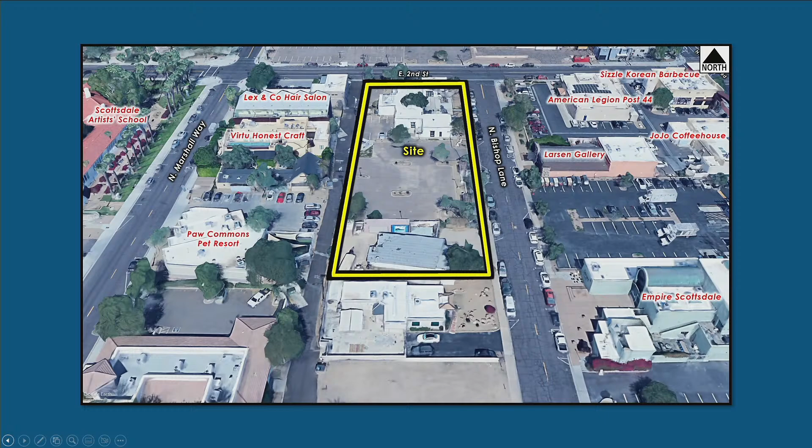Here's a closer look at the subject site at 2nd Street and Bishop. You can see some existing structures on the building. There was previously a restaurant there that's been vacant for a number of years, as well as a smaller office building on the south end of the site. The site has since been demolished and cleared in anticipation of the future development. The surrounding area is mostly other low-scale commercial uses and residential. The existing zoning is commercial C3 in our downtown overlay, which does allow the proposed mixed-use development as shown today.

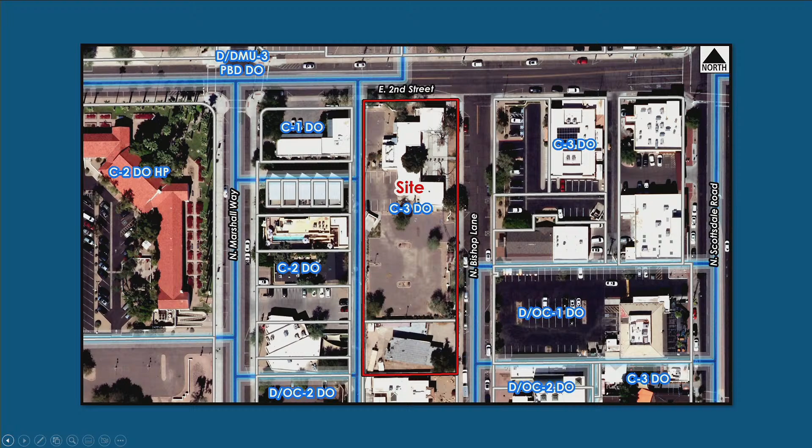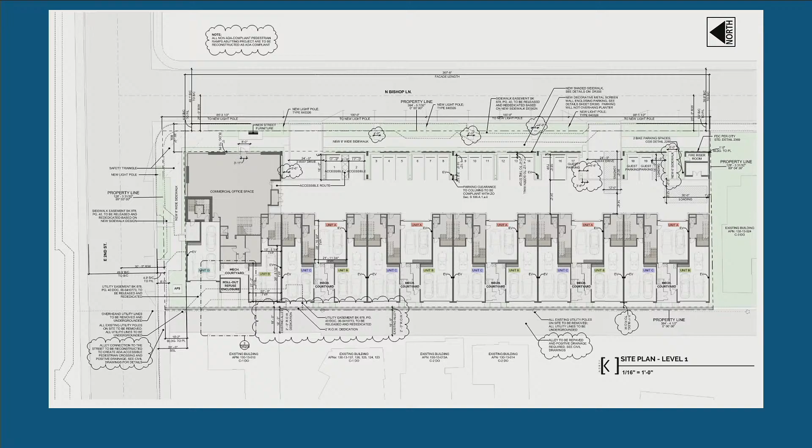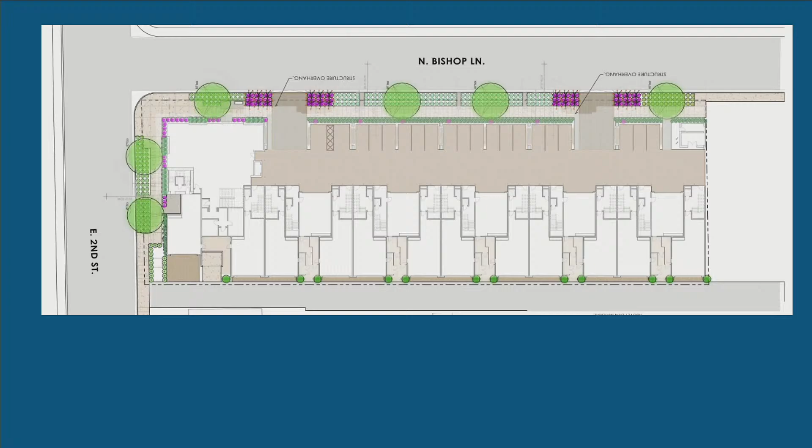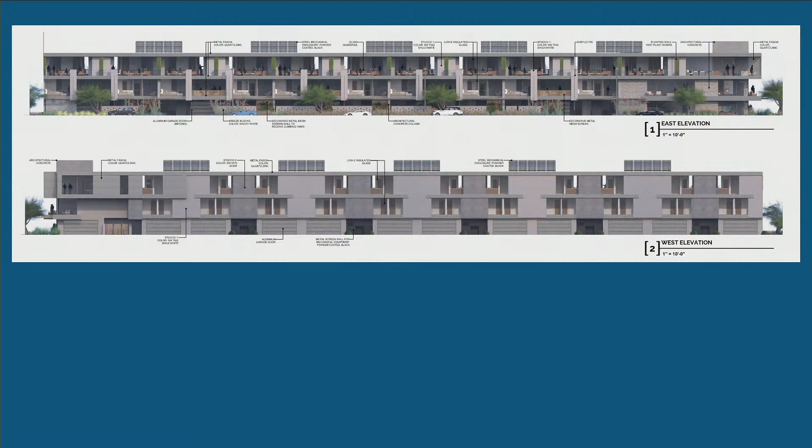Here's a look at some of the building elevations. On this screen, the east elevation is on top and the west elevation on the bottom. You can see it's a 3-story building, capping out at about 36 feet in height, exclusive of the mechanical equipment on the roofs.

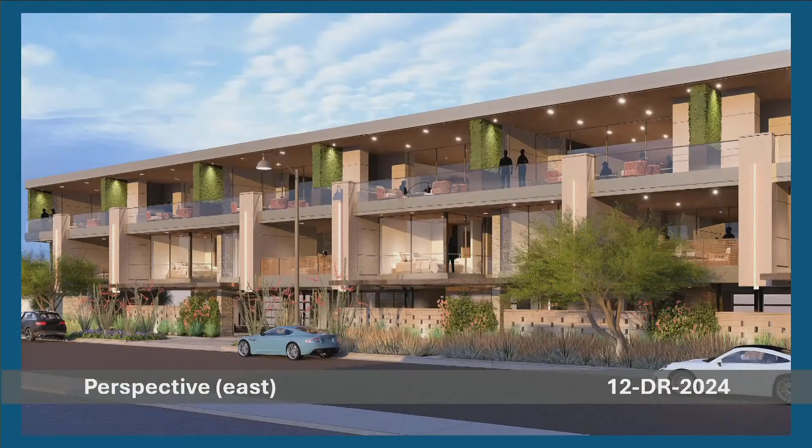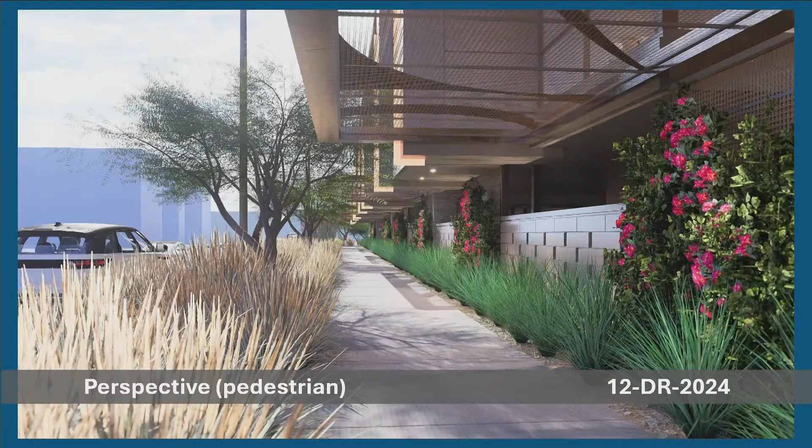Getting into some of the architectural perspectives, this is a view of the east elevation fronting on Bishop. A quick look at the north elevation on 2nd Street. And this is a look down the pedestrian walkway along North Bishop, showing how the landscaping and building overhangs provide shade for that walkway.

To summarize, the action requested this afternoon is for approval of the site plan, landscape plan, and building elevations for the mixed-use development we've just reviewed. That concludes staff's presentation. I'm happy to answer any questions, and the applicant team is also here with a presentation prepared and available for questions. Thank you.

Thank you. I think I'd like to see that presentation, please.

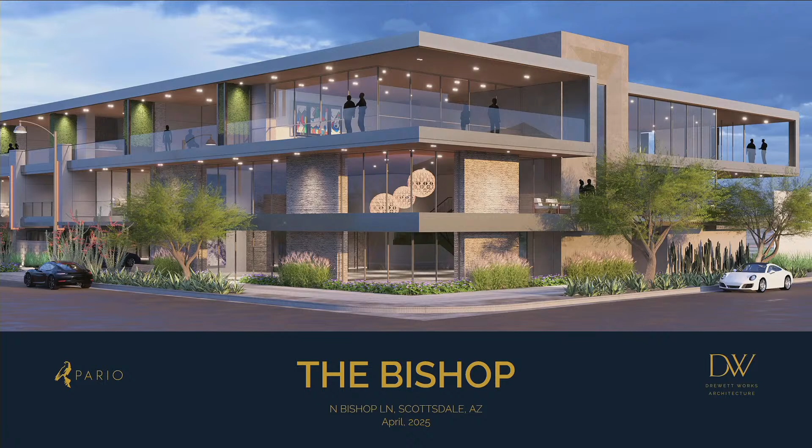Good afternoon, Madam Vice Mayor. I'm CP Drewett with Drewett Works, and this is my partner, Gordon Berry. We're both with Pario Development. Just to run through the project quickly, we've been working alongside the staff here at Scottsdale now for more than 2 years, and it's been a long, arduous road, but I'm thankful we have such a partnership, and it's been great working with Brian.

So presently, we have 17 luxury condos, a ground floor commercial office space of approximately 4,700 square feet, and that office space also has a 2nd story element opportunity. The commercial space could then reach upwards of 6,800 to 7,000 square feet. We're well under our density. Density numerics allow us 35 units per zoning, and we're at 17. We're also within height compliance.

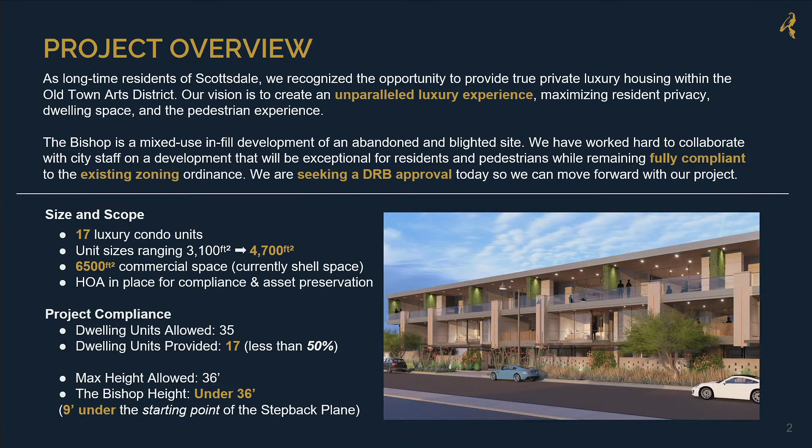One of the larger objectives of the project was to elevate and heighten the pedestrian experience in this developing museum district. We wanted a building that conveyed the art district and provided great opportunities for pedestrian passageway through. It's a good connective tissue between Scottsdale Road and other future developments we're looking at coming on board here in Scottsdale, adding a nice cohesive communication of the building to pedestrians upward.

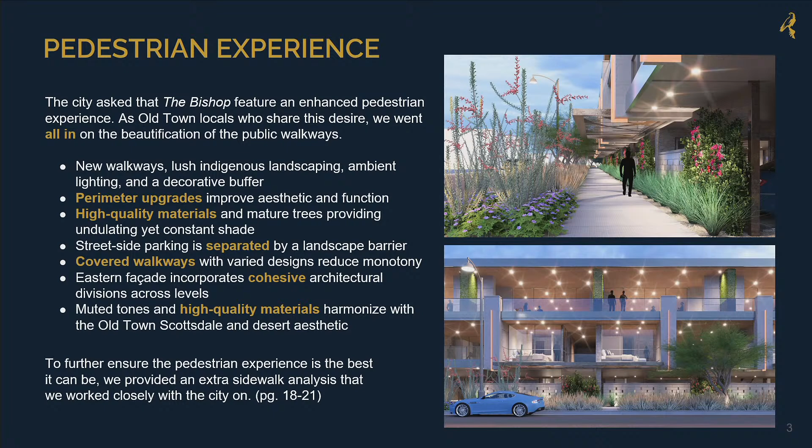The building steps back, and this east facade was really critical for us to activate, so a lot of our outdoor living spaces are focused on this fringe. This whole facade was one of our larger objectives. We have desert muted tones used across the project, as we'll see in further slides.

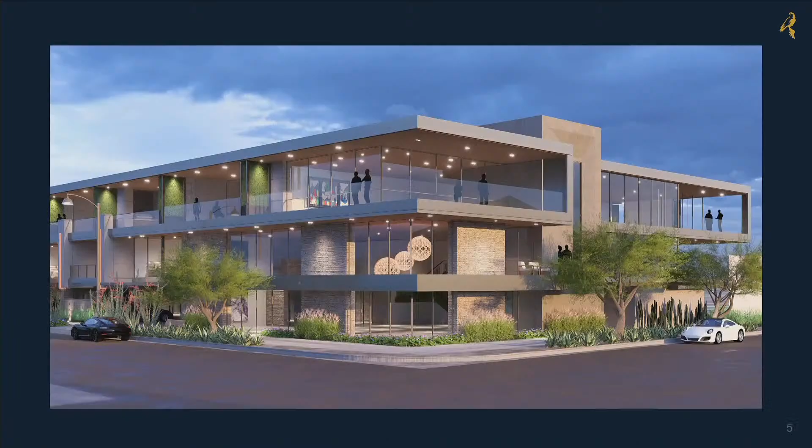I'll run through some of our renderings. This is that hard corner that we've looked at multiple times. Of the 17 units, 12 have access off of the alley, and 5 will enter off of that parking area facing east off of Bishop. This gives you a little more of an idea on how the living spaces will engage this eastern facade and the indoor-outdoor environment.

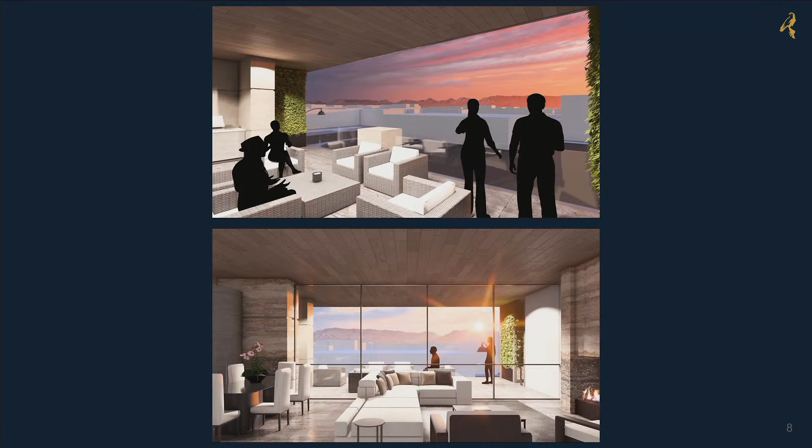And then this is the northern face. It's the most visible face of the building, and I think, again, this is where we're elevating that pedestrian experience. This gives you an idea of looking out of the units, celebrating the McDowell Mountains and some of the distant views.

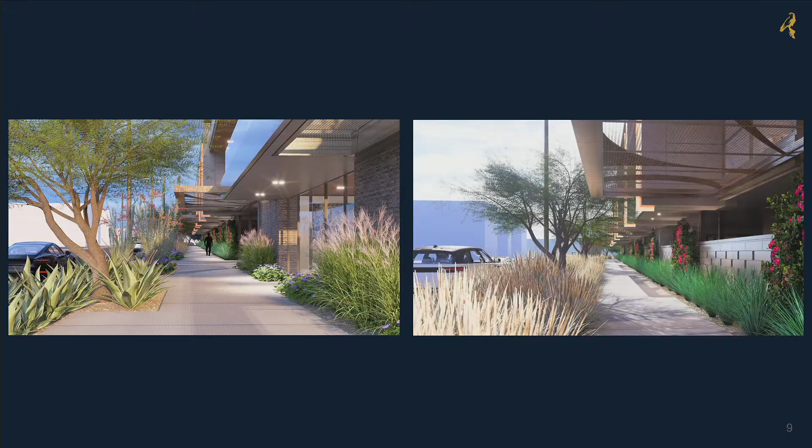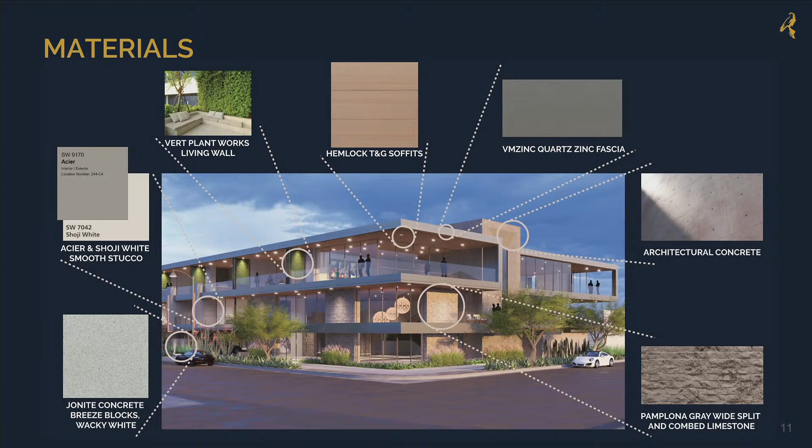This gives you a story of the materiality. Primary material is a combed limestone, gives us nice texture, a nice warm desert tonality. We have zinc fascia, architectural concrete. We're deploying hemlock soffits on all the underside of our roof lines. We have multiple stucco colors, and then we're going to utilize some breeze blocks that are along the east facade that help separate the parking from the pedestrian experience.

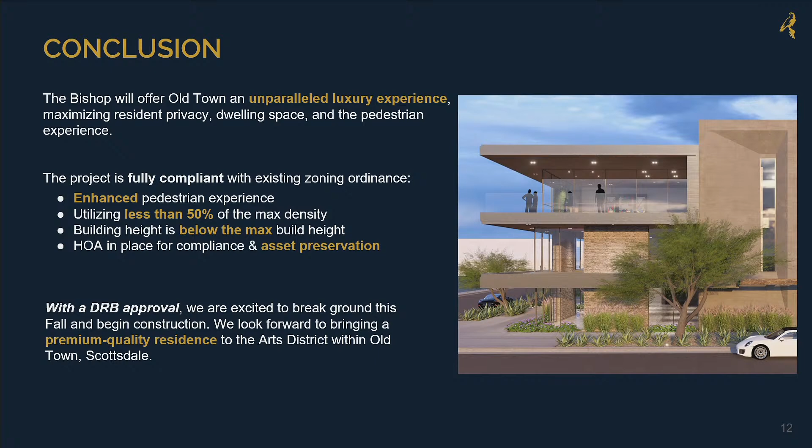Largely, we're 50% below the max density. Right-sizing the project was something that was very important to us, to really play into the hand of what the future zoning and other developments that are underway in this area. And we're available for questions.

Thank you. Do we have any questions for the applicant or for the city staff?

My question concerns the western facade where the garages are. I noticed that you have planters on both sides of the garage entryways along there. Is there concern that whatever you put there will get out of hand and get too large, and could interfere with either sight lines or vehicle traffic? Have you addressed that?

Certainly. Multiple things - we could invite a stipulation on what the plantings are. I know that oftentimes those can grow and become a sightline hazard. We would like to establish something that could help assist in softening the alleyway. We'll also have an HOA in place, and we're glad to stipulate in our HOA that both continual maintenance and/or species, or it could just be something that we affix as part of the building landscape package, is something that would remain that we could all find agreeable. Okay, thank you.

Do you have anything about this material you're using for screening right now for the equipment? Because this is going to show up on the southern elevation as well. Yeah, this one—do you have anything that shows this material?

I don't have that right now, but what we're using on that is a powder-coated steel. Arguably in this image we're using steel angles, so we're getting a little bit of shadow just because of the rendering process. The metal would be powder coated for those surrounds, and it would be in keeping with the rest of the building, so it wouldn't look as visually heavy.

Yeah, this one I'm having a hard time envisioning. Maybe the other architect on the docket could explain more, but I'm having a hard time seeing the screen. Again, I love the building, I love what you've done, but this screen here, I'm having a hard time seeing how it fits with the architecture. It looks okay on this rendering, but I've never seen a screen that looked good once it was actually installed. So I'm just curious about the material on this one—I don't know if there's another option.

And I'm assuming whatever you have right now for your duct is going to be all on the top of the ceiling within the unit, right? You don't have any duct going in on the top of the roof, it's all within the unit? Correct. These would be roof-mounted condenser units, and all the air handlers would be within the units, so all the ductwork would be within the units.

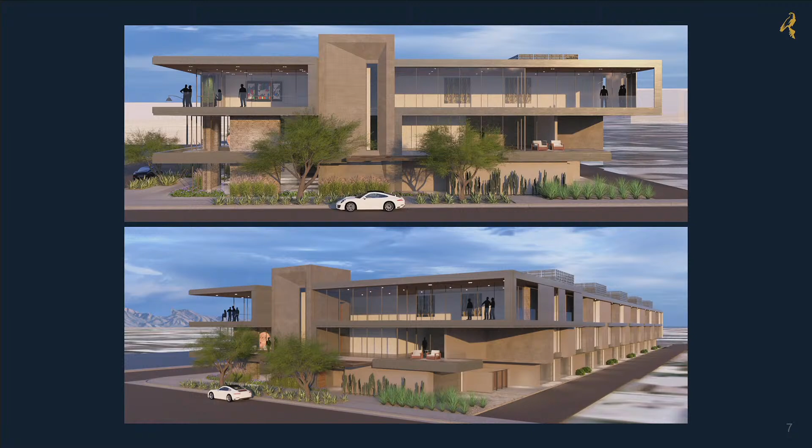My one comment on the design is really on the southern facade. It seems like your zero lot line wall is following essentially the outline of the area that needs to be rated and protected from any openings. I know there are two projects going on here, one on the south side and one on the north side, and it seems like there's a remnant property right in the middle. Is that correct?

Correct. I do know, if I remember correctly, the project to the south is doing another zero lot line wall, but it's got a CMU pattern, some sort of macro graphic, not a ton of cost. I would ask that you do something on the south, not a bunch of design features, but something that breaks up the massing, even a 4-inch drop. I don't know if you have an elevation of that, or staff had it in the presentation.

Can we switch back to the staff presentation? I know that's the last place you want to spend money, but I do think for the time being it's a condition that's likely going to be there for quite a while. I think we could easily perforate that facade as well.

Yeah, so it's this facade you're referring to. It may be as simple as creating a base condition with color or texture. Is that intended to be a full concrete wall down there, precast or cast in place? This presently is just a plastered surface.

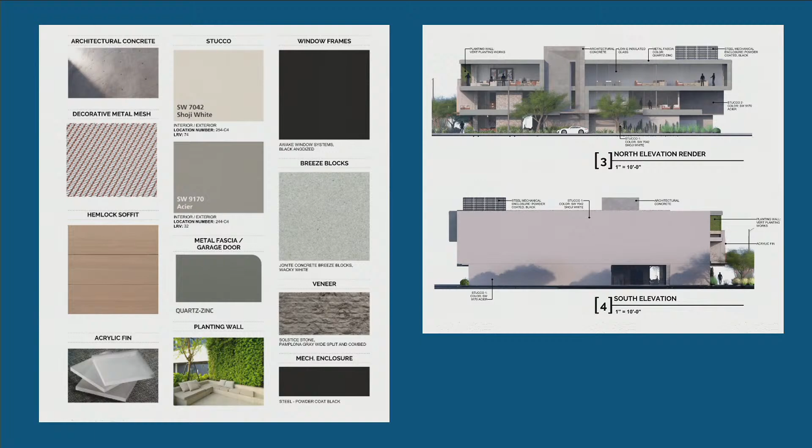Okay, but I think we could definitely explore undulating that facade some. It's risky to put any fenestration on that, but I think we could definitely do some undulation, or it could be solved with texture and color—something that may accent or create a base condition, or break up the monotony of that singular uninterrupted surface. I don't think extensive fenestration is possible anyway, you probably don't have the room to your property line. But something with texture and color that engages that facade from a macro sense would be great to see.

That's my only comment on the project at all. So I appreciate the project. Thank you.

Well, first of all, I want to agree with my fellow board members that the project is really nice. It should do wonders for that area of the city and for what's there now. As far as the mechanical screening goes...

I've seen louvered mechanical screens here in Scottsdale dating back to the 80s, so to me it's not a new concept. In fact, I like it because from an inspector's point of view it allows ventilation to flow through the system, which is extremely important. You start putting hard mechanical equipment screens around equipment and you start having failures.

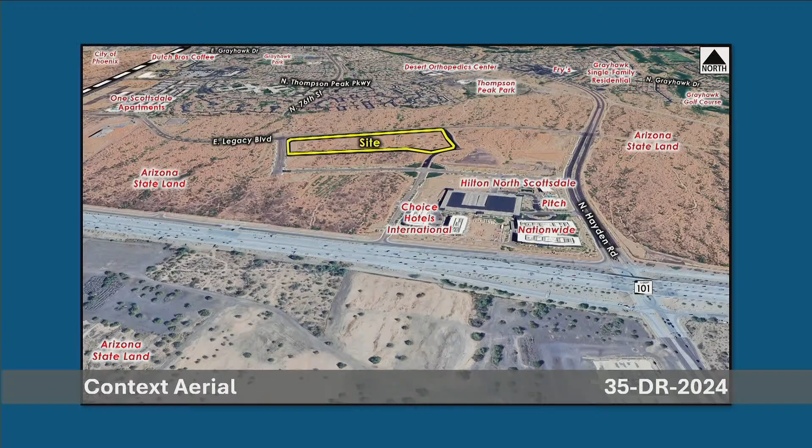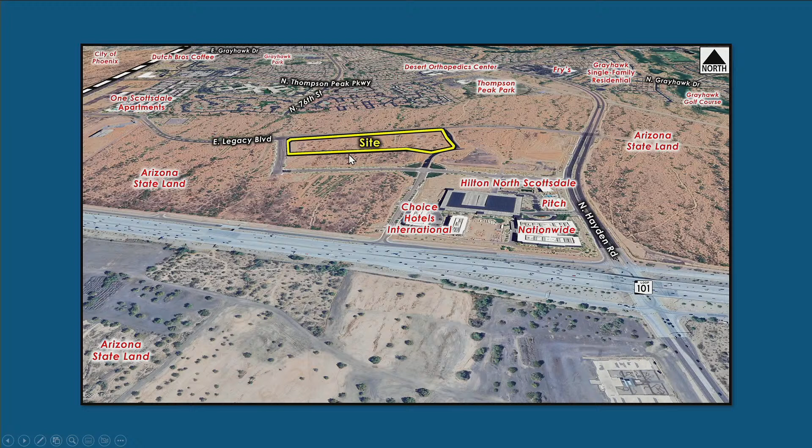The site is located on the northwest edge of the Cavasson 130-acre master plan community. You can see the southeast quadrant of that master plan has been almost fully developed. This project, and there's a project to the south Toll Brothers is doing, so this project and the Toll project to the south will be the first residential products as part of this Cavasson master plan. This location is at the southeast corner of Legacy and Miller Road.

A closer look at the location. Again, to the south would be a Toll Brothers residential project. I believe that's also townhomes.

So this is the site plan and the landscape plan combined. Most of the landscaping is along the perimeter, which is very important to the Cavasson folks. Lots of trees and then ground cover along - they have four street frontages, actually, so there's a lot of buffering along all four street frontages.

Another key component of this project from a staff perspective was providing pedestrian connectivity to those streets, and that is accomplished for all four streets. Particularly, I was concerned about this eastern street frontage because that's what connects the site to the rest of the project, so anybody that wants to walk over to the Pitch Restaurant, for example, Cavison would use one of those exits. There's also a circular park at the center of the Cavasson project meant to be a community gathering spot, and so this connectivity to that Reveille Road I thought was rather critical.

There's also a dog park and an amenity area. Primary access is shared - I think, is this the primary access or is this considered secondary for you? That's number one? Yeah, this is shared access with the Toll community to the south. Went through a couple of different design iterations, but that's what that is. And then this is secondary access off of Legacy Boulevard.

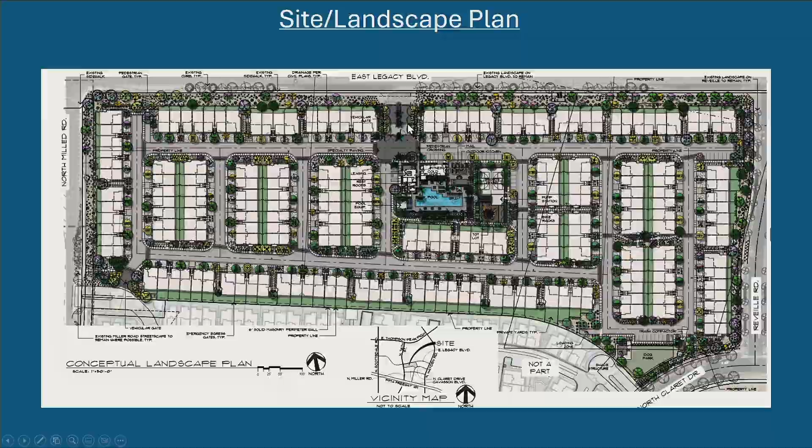From an open space perspective, as I mentioned, there's the central amenity area with lots of open space and streetscape along perimeter streets. Each unit in this community will have its own private open space at ground level. The units along the south property line will have larger private open space areas, which I imagine is to provide a little bit of buffer from the Toll project. But overall there's pretty good open space distributed throughout the project.

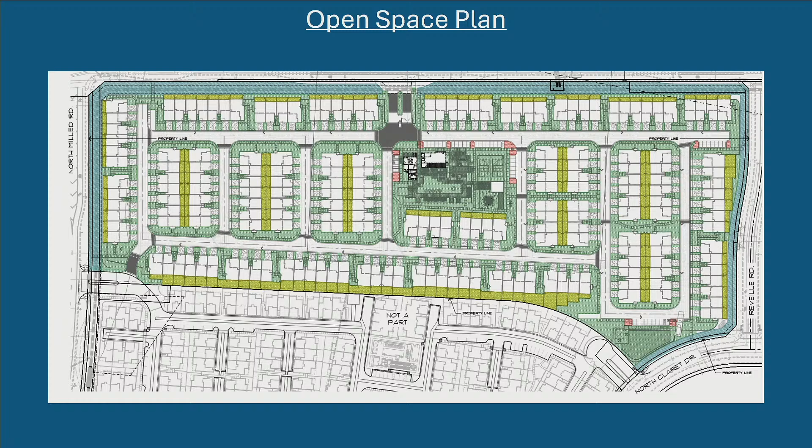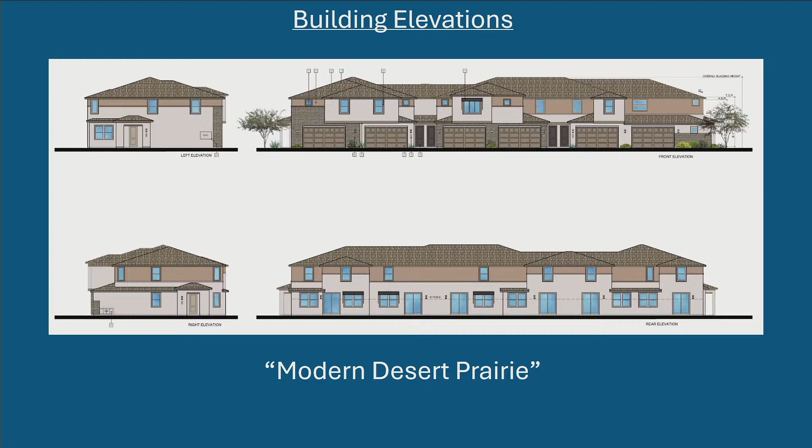There are two themes proposed as part of this development. There's the modern desert prairie, which this elevation shows. By the way, these buildings are about 36 feet in height. There are various size buildings - 3-plexes, 4-plexes, this is a 6-plex elevation here, and there's also a 7-plex elevation. So this is the modern desert prairie scheme.

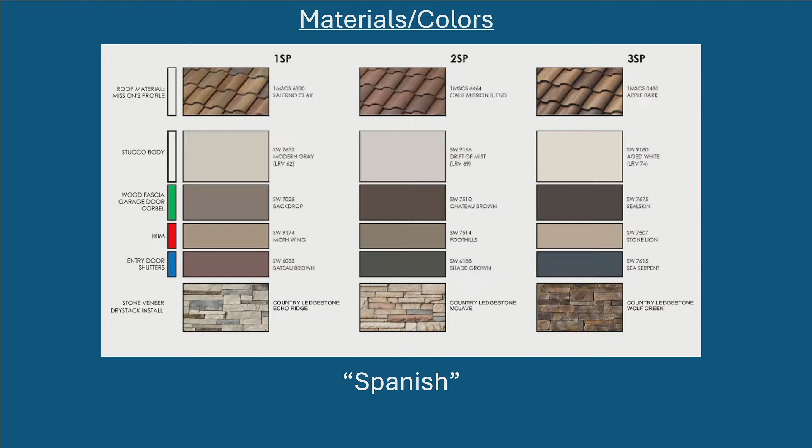And then there's a Spanish theme as well, as displayed here. Each one of the themes has 3 potential material and color palettes, all of which respond favorably to our sensitive design principles - desert-appropriate colors, Sonoran desert colors, and a little bit of variety in the stone being used to provide some visual interest to the buildings. This is the 3 options for the Spanish theme.

Again, as a brief presentation from staff, the applicant does have a presentation if you'd like to see it. Otherwise I'll open it up for comments or questions. Let's see the applicant's presentation.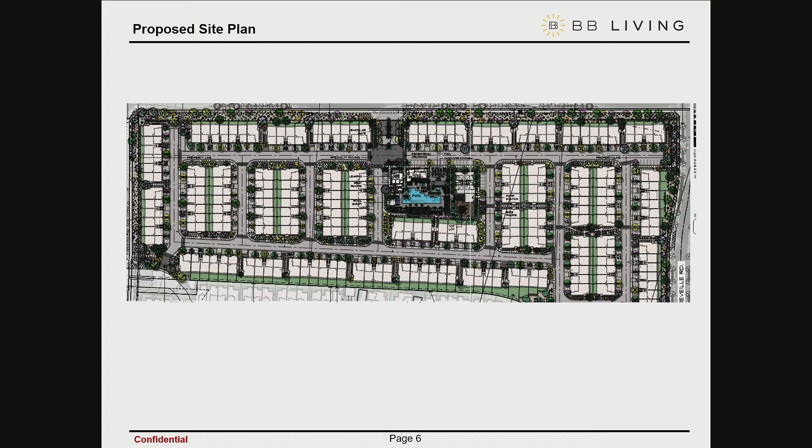The site plan you've seen is again very heavy on the landscape. The main thing is going with the theme of the Cavasson master plan. The walls and landscaping are of very high quality to match everything else done up in the Cavasson, and a lot of it plays off what Toll Brothers is doing right next to us, kind of keeping with them. We've worked very closely with Toll Brothers over the years, and this is just another project we're building right next to them.

This was a footprint of our amenity building. We have our leasing office, and separately a very nice fitness room. We have the sauna, and we're also planning an indoor driving range with a simulator - some more high-end amenities for our residents up in this area.

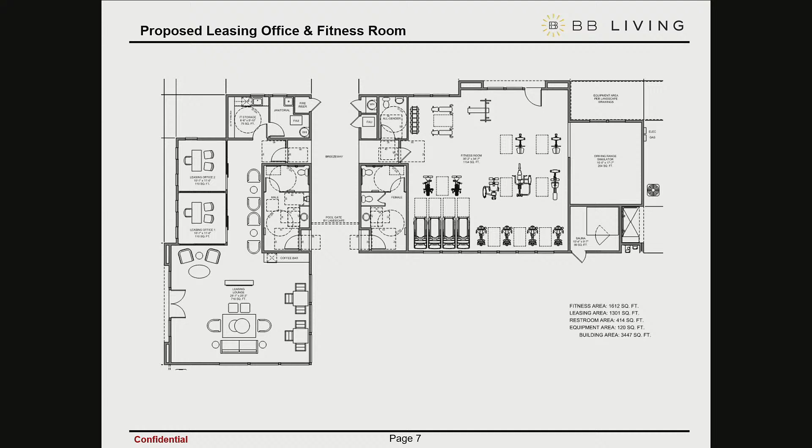That was the presentation I had. I have the architect here as well if you have any questions for us. Do we have any questions?

I like the project, I like the layout and the circulation. I think it's good to see some dense residential next to the master plan over there. The only question I have, and maybe staff or the applicant can answer it, is when we do townhomes, I know it's a for-rent product, isn't townhomes, you know.

Is it going to be platted as townhomes, like fee simple, or is it still multifamily for rent? No, it was not going to be platted, it's more of a site plan, one lot. So this is my confusion. Usually when you say townhome, it's platted to be fee simple to sell. So it's a little different between a townhome and a for-rent product. So I see this as more of a multifamily project, not a townhome project. Is this correct or no?

From that point of view, yes, it could be looked at as multifamily because it is one lot with multiple buildings on it. But townhouse has a technical definition in the building code, and it's more about how it's constructed than how it's platted. The building code doesn't address whether there is a property line between the dwelling units. So technically we're going to build it to meet the building code as townhouses, but from your point of view, it is one lot with multiple dwelling units on it. What about from the city's point of view? Is a townhome different than multifamily?

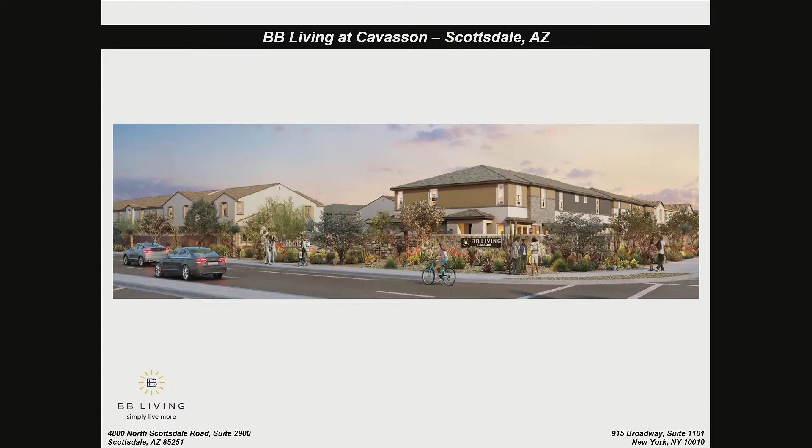No, I would commend the team for the two distinctly different styles. The change up of the shaping of the roofs is really important, it'll help distinguish the buildings on site and not seem like a giant project. So I appreciate that. I think staff should take note that we're working on making sure there's depth in the facades.

I don't necessarily think the way you're doing the eaves makes the roof structure totally different, so I don't think you'll see a difference between the two, since you've got a full hip structure across an entire building. Maybe it has to do with creating a bump out on the top of the cornice, or shaping the top of the cornice, something that gives a little depth. I know that could be a bit of a pain, but it's not adding any structure or framing to the building, just maybe something done with foam to give a little depth to the facade.

So I'm going to make a stipulation, assuming you guys would be okay with staff making sure that depth is maintained on the elevation. It's generally part of our design guidelines anyhow, and I'm assuming all the window depths are conforming, but that's actually something that has to be on every single building constructed in Scottsdale. Otherwise, the distinction between the styles, the shifting of the building types and the color palettes is a great move, and I'm looking forward to this feeling not like a flat roofed apartment, but like larger shared homes, which I think is a new aesthetic in the area. So I appreciate the work.